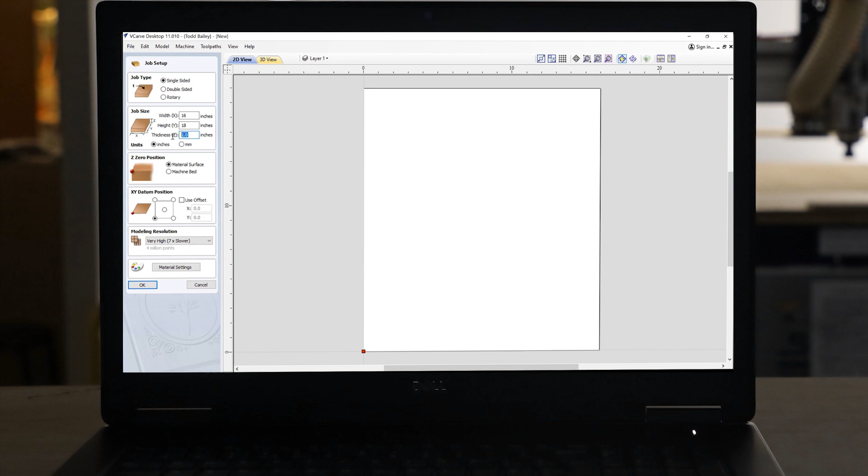First thing we're going to do is open up our software and set up a brand new job. The dimensions here are going to reflect our layout sheet, so we want them to be as big as the piece will be once it's all assembled. Let's go ahead to our Design and Make folder and have a look at the Furry Friends #2 model project.

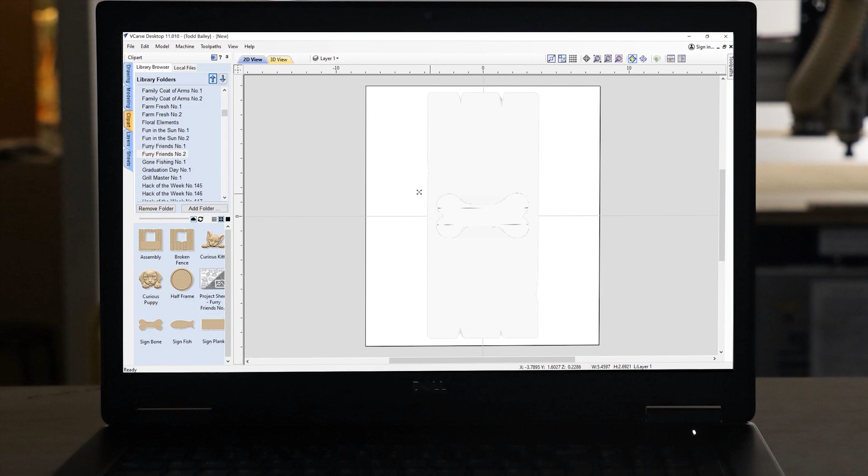Let's start off with the plank for the back. So this is going to be on its own sheet of material. We're just going to size it up to fit the height of our actual sheet that we have. And let's grab the bone next, and we'll just position it near the bottom of that back plank and size it appropriately to fit in there. Now let's grab the curious puppy and bring that in, and we'll size it up to fit as well.

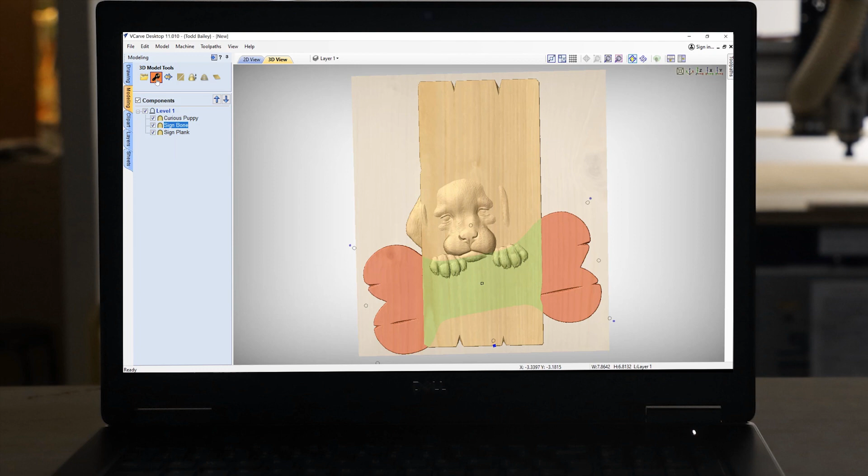Once we have that positioned where we want it, let's have a look at our 3D view and start to add a bit of base height to the bone and the puppy face to push it up through the back plank. And this is mainly just to show a customer potentially what the layout's going to look like, because we're going to remove that base height later on once we break this up onto their own sheets.

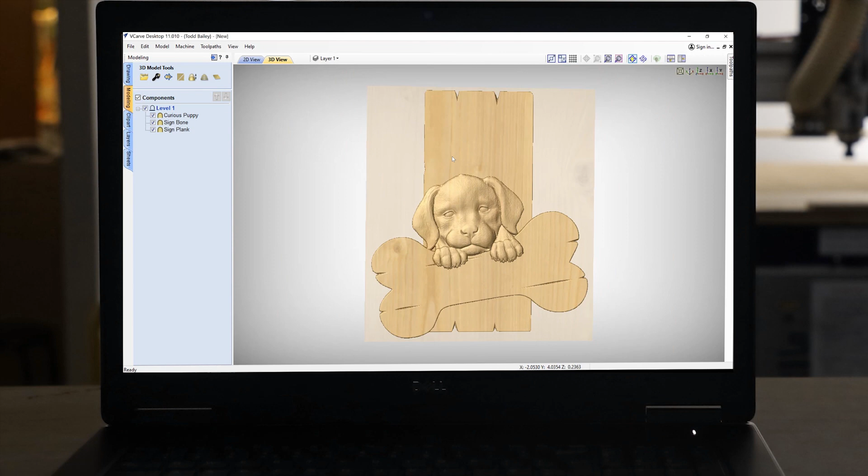Now once we have that layout all correct the way we want it, we can go ahead now and lay out some text for V-carving. We're going to compose our whole section of V-carving text here, and then we'll break it up onto individual lines in just a second. Choose a nice font that's going to work for this project. We'll go ahead and break those up onto their own individual lines and place them where we want those lines to be on our sign.

This is where you can get a bit creative with your text. I like to kind of tuck things in behind things and layer them up nicely so they look kind of interesting. And of course you're going to want to look at your kerning and so on once you get everything sorted out and where it needs to be. I'm pretty happy with that.

Now, the next thing we want to do is to break it up onto sheets. So let's rename our initial sheet layout. We'll create a front sheet that's for the puppy's face and the bone, and then a back sheet for the back plank. Let's copy the parts that we want to have on the back on their own individual boards to the back sheet. And we'll do the same with the puppy face and the text for the front, and we'll copy that to our front.

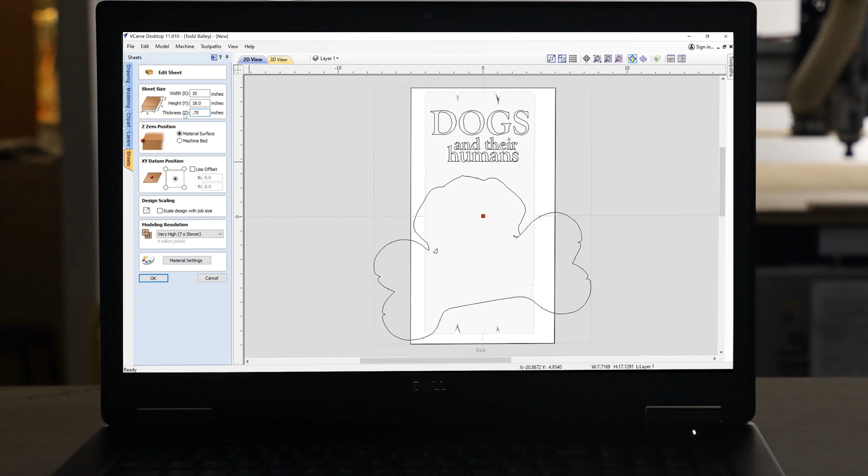We're going to need a vector outline of the puppy and bone so that we can create a pocket in that back plank. So we've done that there and copied that to that back sheet. Now what we're going to do is go ahead and set up that sheet properly by creating the proper thickness and the proper width.

So now we're going to need a proper pocket vector. So we're going to select this vector that we have. We're going to offset it out once the radius of our tool, and then inwards twice the radius of our tool, and then outwards once more. And we're only going to keep that last vector for our pocket. Top tip there. And there we have it.

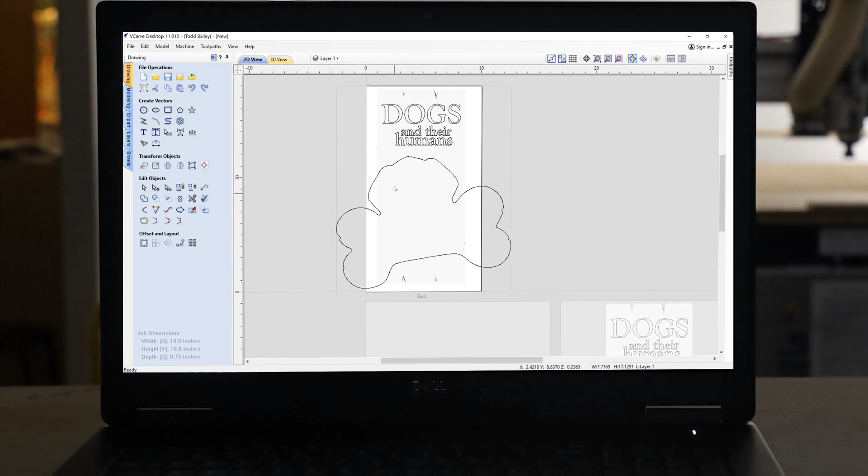Now what we're going to do is we're going to go ahead and create a vector boundary from the plank, offset that outwards 1/4 inch, and then we're going to use that to only keep the parts of the two vectors that cross over each other, which is that inside bit. And that's what we're going to pocket out in the end.

Here we go now. We're going to do the same with the front sheet, except we're going to rotate the actual layout so that the grain of the wood will follow the actual plank sign or the bone sign. Adjust our sheet appropriately so that it's the right size for that particular part of the layout.

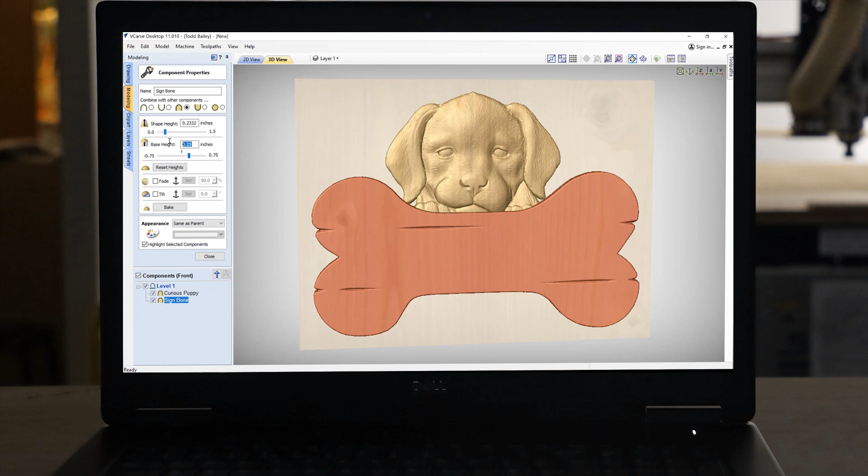Okay, let's have a look at these two components here. We're going to need to remove the base height that we added to those initially, but then we're going to add a little bit of base height to the puppy to push him up through that bone. And then we're going to want to check the shape height of our composite model and make sure that it fits within our material thickness. 0.65 should do the trick.

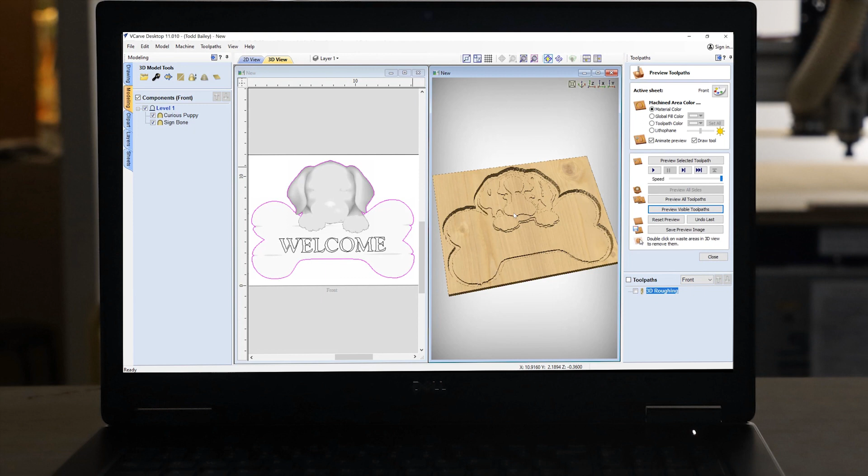Yeah, let's go ahead and start to create some tooling for this. We need a vector boundary to isolate our tooling. We'll need to check our material setup. And once that all looks good, we can go ahead and start to create the very basic tooling for this job, which will be a roughing pass, a finishing pass, a V-carve pass, and then also a profile cut.

Some of the things you're going to want to keep in mind is that you're going to want to project your V-carving onto the 3D model. That's at the very bottom of the V-carving form. And always, always preview all of your tooling to make sure that it's exactly what you expect to see on your machine. And if not, go back and change it.

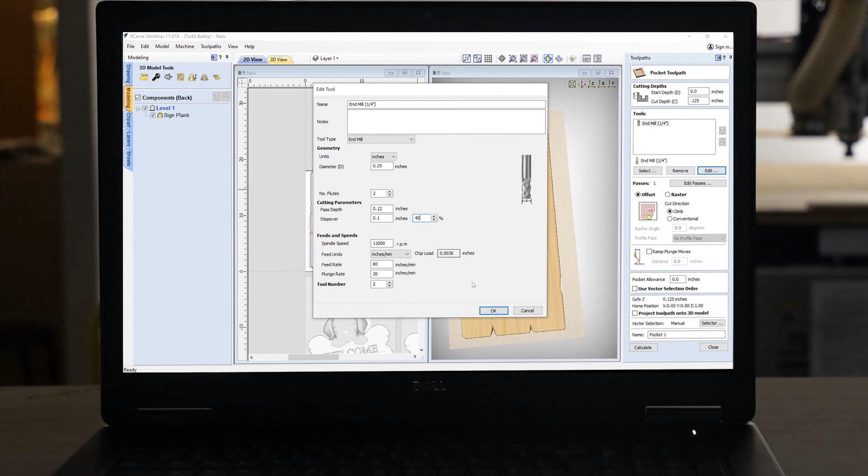Let's move on to the back plank now. Now, instead of us going ahead and doing a 3D cut across this whole thing, what we're going to do is we're actually going to use that profile around the plank to create a very easy profile cut that's going to look pretty much like what you can see in the 3D model, but we're going to save ourselves lots of time. But the first thing we're going to do is we're going to cut that pocket out where the puppy and bone is going to fit in the end.

There we have that. We used a little bit of an allowance on that to make the pocket slightly bigger. Do our V-carving next. And again, you'll note that we haven't done any 3D cuts on this back plank. Close that down, grab that vector that we have for that boundary. We'll calculate a profile toolpath to cut out the board.

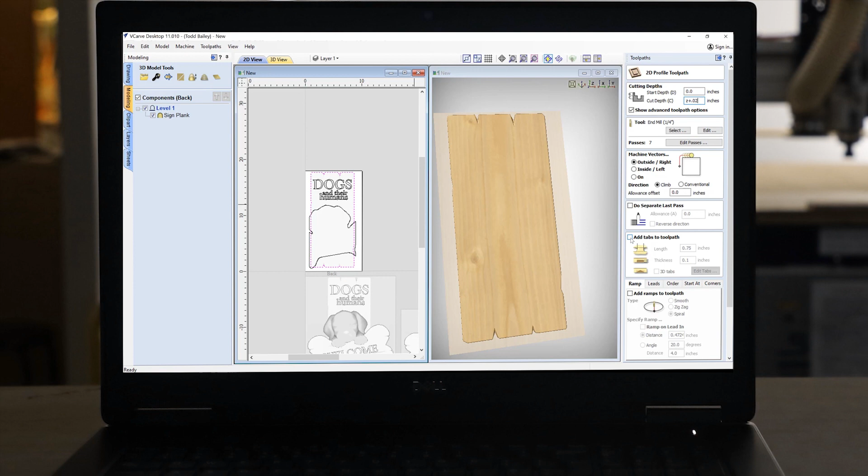And in the end, if you wanted to reestablish those nice sharp points on those cracks at the top and bottom of the board, you could just use a Stanley knife to do that with. Let's calculate that. There we have it. All said and done. Now we've got the two sets of toolpaths. Let's get off and cut them in the labs.